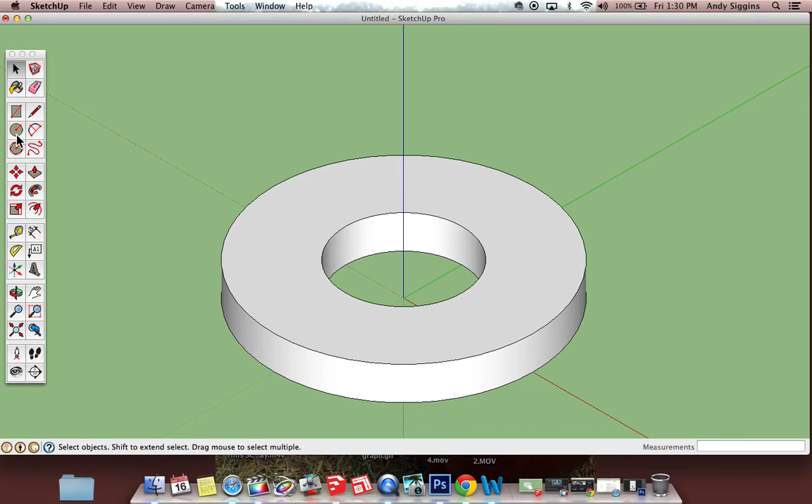All right, once I've created the ring for the metal base to the appropriate dimensions, in this case I believe it's 26 millimeters thick, we want to go back and we're going to have to draw on top of this plane, this elevated surface. And if I use the circle tool, it's really tough for me to draw a circle on top of this surface because there's no reference for the center of that circle currently. So the center of the circle we know is on the origin, but if I click and draw, that circle is too low and it's not going to draw on top of this surface.

And so one easy step that I've found is that if you click on the origin, which is where we got started, and draw a line up the blue axis to a length of the thickness that you're currently working, when you apply your circle tool in the next step and reference the end of that line, which you really can't even see here, I can now begin to create the lines or the circles that I'm after. Okay.

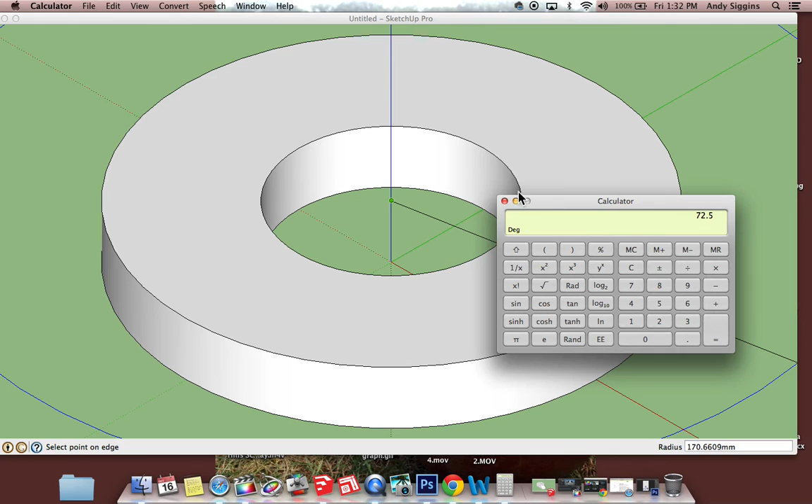So what we'll see is that the radius of this circle is 72.5, and knowing that it's 72.5 will allow us to create the outer lip of this. So 72.5 is going to create the outer edge of that little lip that's on the metal object. The thickness of that little lip is also 3 units or 3 millimeters wide. So subtract 3 from that, which will take us down to 69.5.

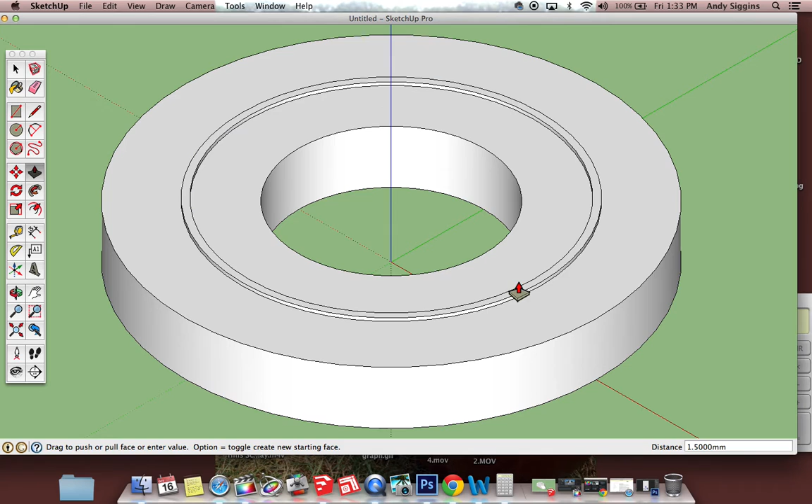And I now have that little lip plus the metal cylinder, which is later tapered. The height of the little lip is only 1.5 millimeters, or in my measurement I found it was only 1.5 millimeters tall.

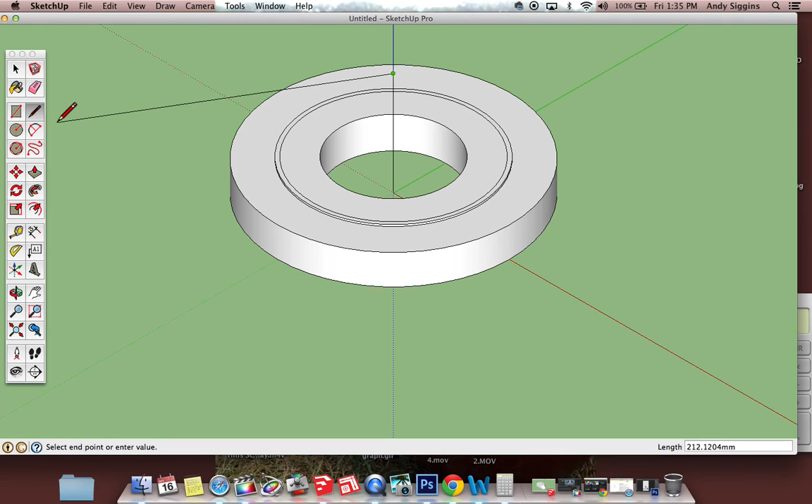Okay, so I was just playing around with some measurements here, and I took note that the overall height of the object is 90 millimeters. So if I went down to the origin and draw a line up to 90, that's the actual height of the object. So if I grab the push-pull tool, I can come up and then reference, hopefully from this orientation I can do it. See if I can't find...

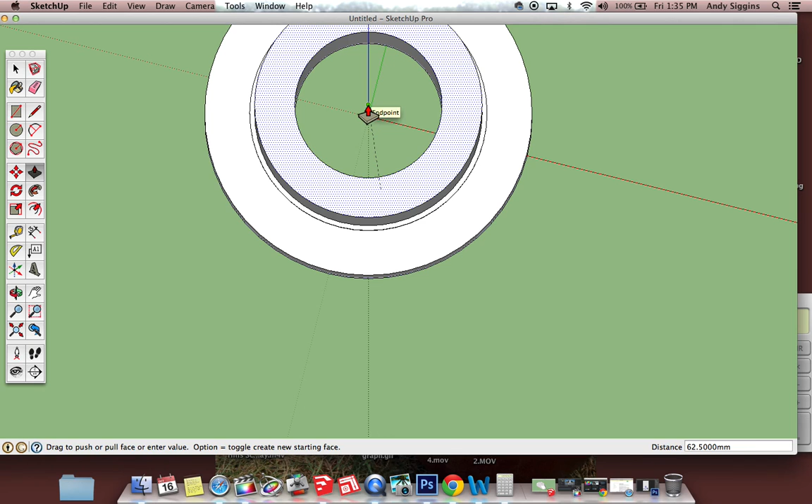There we go. If I find the endpoint of that line, I can now see that I have a 90 millimeter tall object from very, very top to the bottom. I found that that was an easier measurement than measuring along the tapered side. So my overall height on the inside is 90 millimeters, which is where I'm currently at. I come down to my little lip, and then I have my base. So walking through that process hopefully gets some dimensions straightened out.